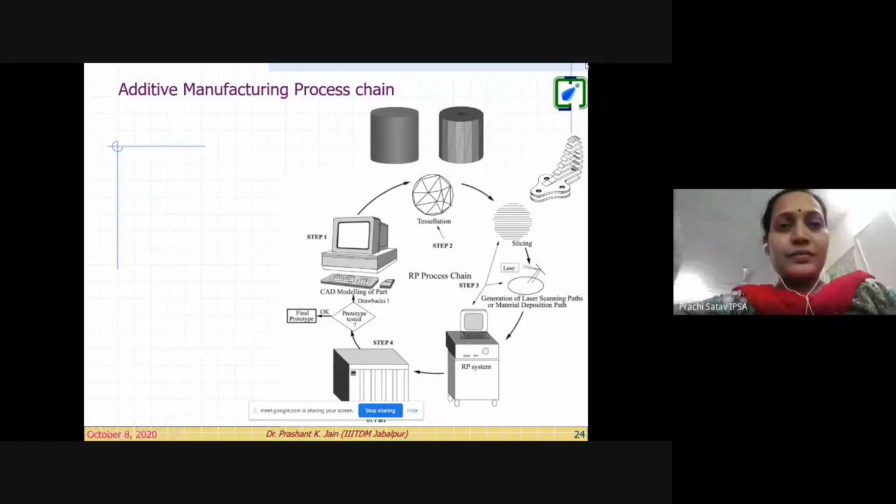So I hope by that time you have gone through some of the lectures on 3D printing. Yes sir, we have completed 2 days with 6 sessions, and today itself we have a session with Dr. U. Chandrasekhar, sir. Okay, fine. Almost we have completed 3D printing of PLA, ABS, and metal also with their practical demonstration.

Right, okay. So dear all participants, this session we have kept completely on the STL file, data preparations, error repairing. Most of the time when you see the FDM printers, the videos of the printers or machines, it's described with a very easy word like 3D printing. As an engineer, we call it additive manufacturing, but now this is most commonly known by the term 3D printing instead of additive manufacturing.

So people sometimes thought that, okay, just like our A4 size HP printer, we can type something on our computer system, simply press Control P, and have a print in our hand. But this 3D printing is not that simple. You require a lot of data preparation, then a lot of slicing, contouring, etc. Only then will you be able to print a good part.

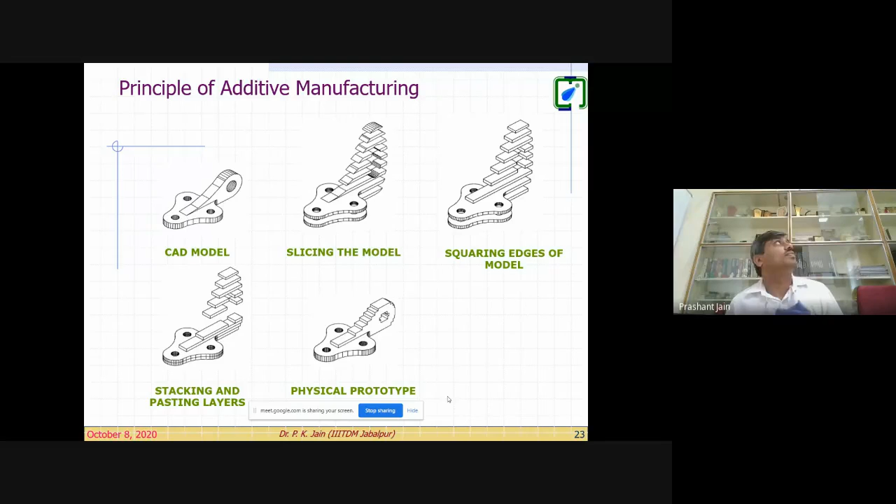Am I audible? Yes, you are audible. You noticed here the difference in two models - here you have the complete finished model, right? But here in the fifth model you got the stair steps, right? This you might have already gone through in some session.

So here, with materials related problems, we can have the minimum layer thickness, but this stair steps will remain there, right? We cannot remove it. So we require a lot of finishing approaches, post processing, polishing, grinding, many things. Based on that we can get the full physical model.

So that's the principle. Now come to the process chain. Can you notice on the top two cylinders? What is the difference in this cylinder and this cylinder? Anyone would like to answer?

So may I? Yeah, please. In first cylinder, that is completely fine shaped, and in the other there are some edges. In other, what is that? Your voice is breaking. Some edges are there.

Okay, anyone else? Maybe one is solid and the other one is hollow. I'm not sure about it. Okay, anyone else would like to add to it?

What is the first difference in two cylinders? First cylinder is a fine one, and second one has some dotted shapes. Okay, anyone else?

Because in the entire session, the key is in these two figures. What I am going to talk about in this entire session is on these two cylinders - what is the difference in these two cylinders and why this difference is coming?

Inside it is a model file, and the second image is the tessellation of the model. It is slicing - after slicing, it is converted to the mesh structure. It will be in model.

Okay, partially true, but that is not after slicing, it is before slicing. We will come back to the details of it. Anyone else would like to comment on that?

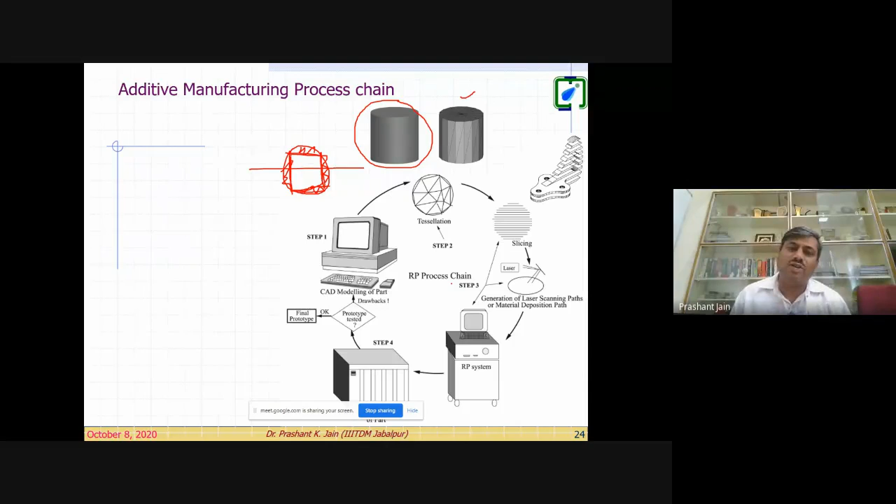To maximize or minimize the volumetric loss in this case, we keep the triangles. You look at this cylinder, all are triangles, right? See, all are converted into triangles. So even though this is a rectangular face and can be represented by a rectangle, we still maintain the standards and uniformity among all the models. So we have the triangles, right?

So this is the tessellation we do, and this tessellation will help us in the slicing, because the next step is to have the slicing. So if you see, I slice in this way - here, this slicing calculation of intersection points would be very tough, but here you see what has happened.

Now this line or this plane in 3D space, it would be a plane. It is intersecting with another plane. That plane is also a triangular plane, and the triangular plane also has 3 straight lines. So finally, your problem is reduced to the intersection of a plane with a straight line, right? That is the tessellation, and what we call in terms of our data format, the STL file, right?

So anytime whenever you go for a 3D print of any object for any machine, you try to get its STL file. Now what is in that STL file? Your surface was approximated by the triangles, right?

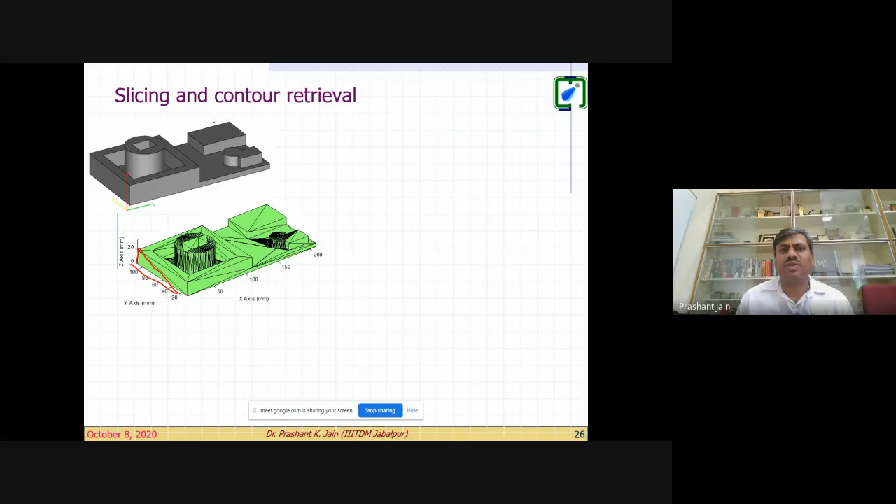Here there is a planar section. So what happened to this planar section? Now this is converted into the STL file. So you have this one triangle, another triangle. On the top surface, you can see this top surface, 2 triangles, one and another one, right? But you see for the circular face, we have hundreds of small triangles.

Why have we taken so many triangles? To approximate the surface more accurately, right? If you take only 2, what will happen? A lot of material would be wasted and it will be sliced like this, right? So tessellation in this way is not possible.

Now look at this, when we try to calculate the intersection in MATLAB, see this STL file is imported in MATLAB. I will show you the files a little later, right? And you can see here the green color plane is there. So that is the intersection plane.

And you can see, can you notice what are these blue dots here? Anyone? What are these blue dots here? Anyone would like to mention? Sir, is it for support material which is to be drilled out? No. Anyone else? What are these blue dots?

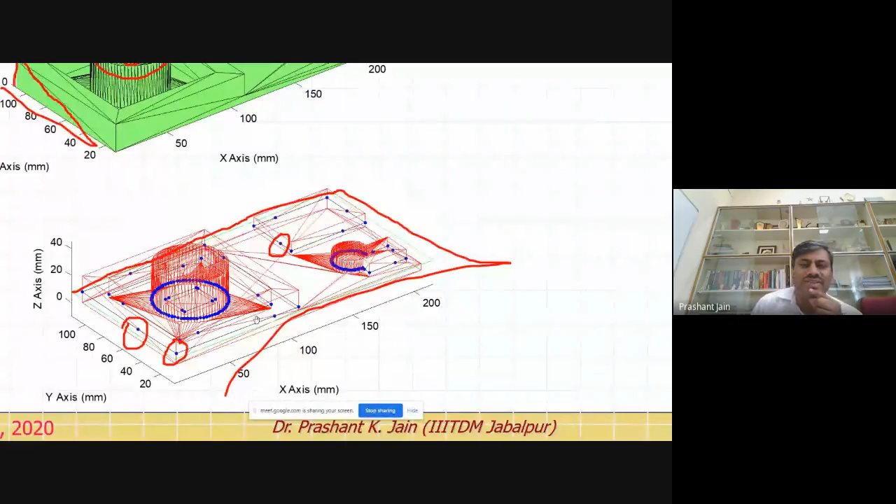Lattice point—this is the intersection point, right? The green color plane is there, and this plane is intersecting with this solid model of the STL file. So what does STL contain? STL has lines, right? Look at this. This line is coming from this end, and this plane is coming from this end, so you get an intersection point over here, right?

And when we connect all these blue dots, what is going to happen? We will receive... if as and when we receive this blue dot and I plot it, I will get this kind of information.

Got it? But this information has no use for us because we want to print this part, and for printing this part we want first layer, second layer, third layer information, and between that the nozzle path is required. So we need to connect all these dots in a logical sequence.

Look at this. When we apply some logic to connect them in a sequence to get the contour information, what is going to happen? We receive this blue color contour, right, and the red color contour. Can anybody tell me what is this red color dotted line and blue color line?

Anyone? These lines?

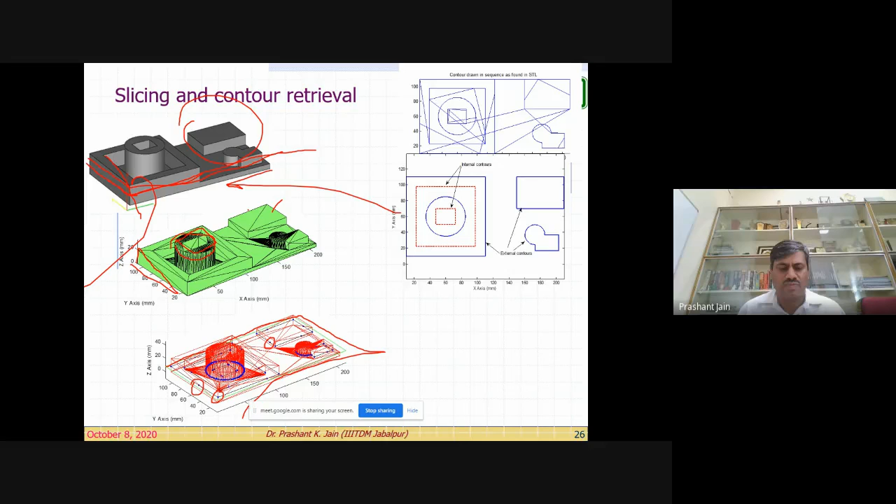Can you relate this figure with this figure? At this stage, if I cut this geometric model at this height—if I cut this model at this stage—we will receive this information. So you see this blue color is the external contour on this model, and this red color dotted line is the internal contour from here. Right? Did you notice this?

Now look at this figure. From here we can draw this kind of external lines, right? And from this you can see what is going to happen: for this, the nozzle will be here, you have to switch it on. Here you have to again switch on this. Here you have to again switch on this nozzle, right? This is going to happen, right?

So what is happening, if I draw a line over here, we can identify based on this contour intersection points, right? At this contour the nozzle will be switched on, and here the nozzle will be switched off. So what will happen? Material will be deposited here. The nozzle will continue to move here, then here again it will switch on, again it will switch off. This point is clear?

So that is the requirement for the STL file. We require the STL file, right?

Now look at this, how we make the model. Have you gone through this software screen before in any other session? Then I will skip, or else I will show you. No sir, it's the first time we are seeing that Magics software in this FDP, sir.

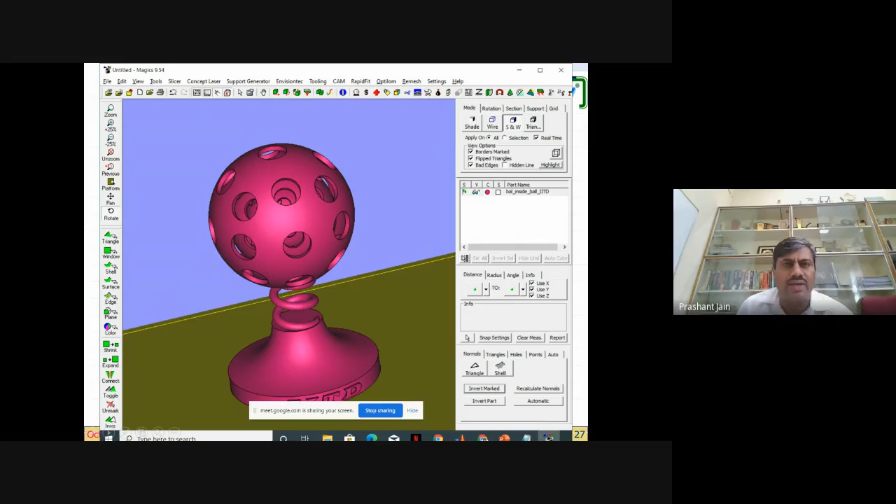Okay, let me run the Magics directly. Look at this, that's the Magics software you have. You can rotate it like this.

So you see here, we have manipulated this STL file and written the IIT Delhi file, right? And I will show you the original file as well. So this is the geometric model you might create in UG, CATIA, Pro/E, Unigraphics, anything, right? And then you have to take it to Magics for error repairing, etc. I will talk to you in detail about what kind of errors we have, right?

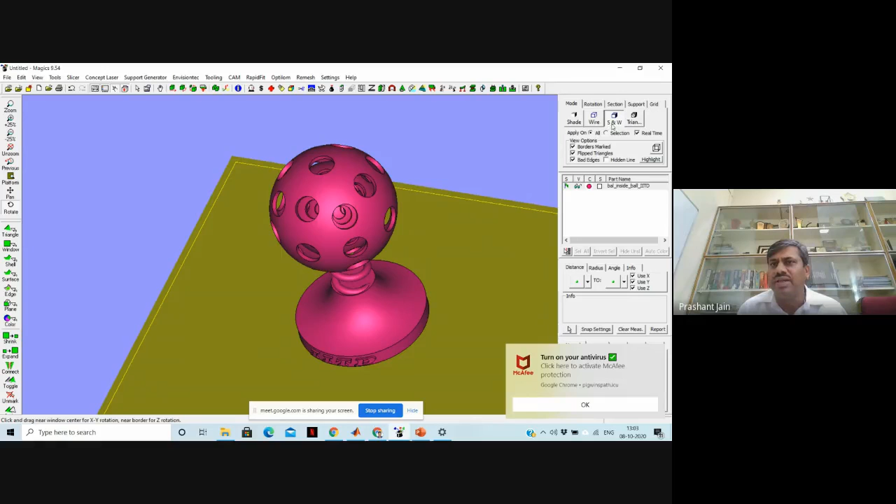So look at this, these are so many triangles you have, right? If I zoom it, you can see here how similar these triangles are, then here the smaller triangles at the cut portions, right? And then you can see over here, even in this spring area, how small the triangles are, right?

Now, if I take a cut, how does 3D printing take place in this case? Whenever you take any model, any sort of model, let me place it in this position. Let me take it to the back and go for a section.

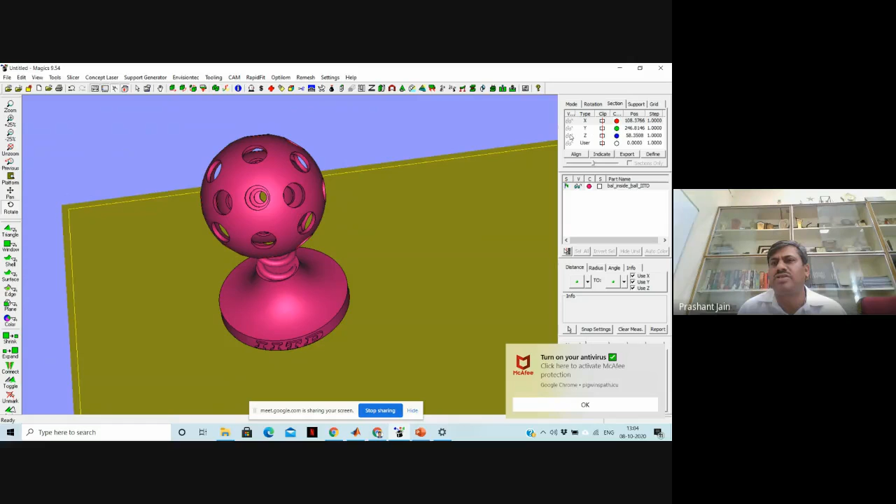Right? Can you see over here? This is the section model. So if you start from bottom, this is the first contour, second contour, third contour, like this, n number of contours. So here it would be a complete circle, right? That is the objective why we are talking about the STL file, right?

You see, at this stage only this is the material to be deposited, if it is an SLS process. And if it is an FDM process, the nozzle will deposit only this much material. You see here, and at this stage you have only one sphere, right?

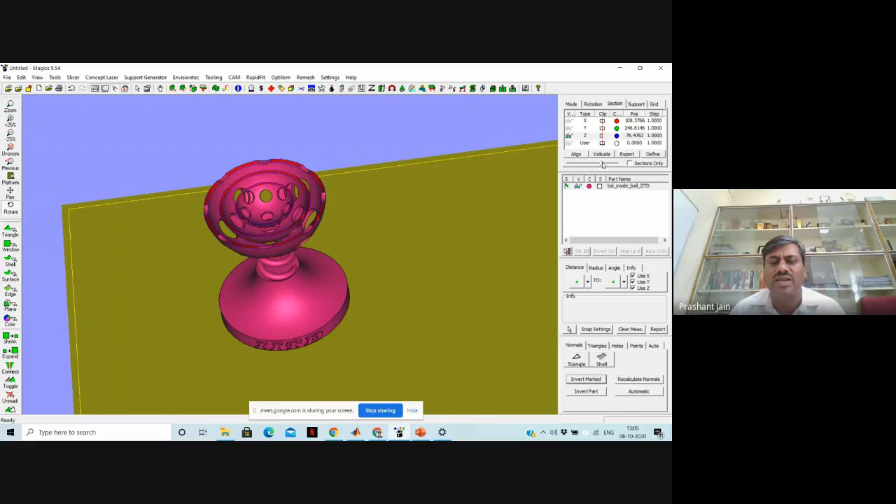Now the second sphere comes into picture, and the clear gap between two spheres is provided by the unsintered powder in case of the SLS process, right? Look at this, the third sphere comes into picture, and subsequently it will keep going on, right? And look at this here,

this contour information is required. You can see here, this is the contour information we want on each layer. And if you look here, in the triangular form, these triangles are cut and the intersection points are calculated at this level. You see here, this is an intersection point, this is another intersection point, and these are connected in a closed loop, right? So many contours on the same layer you can even have, right?

Okay, if you have any query at this moment, you can ask. Then I will go back to it.

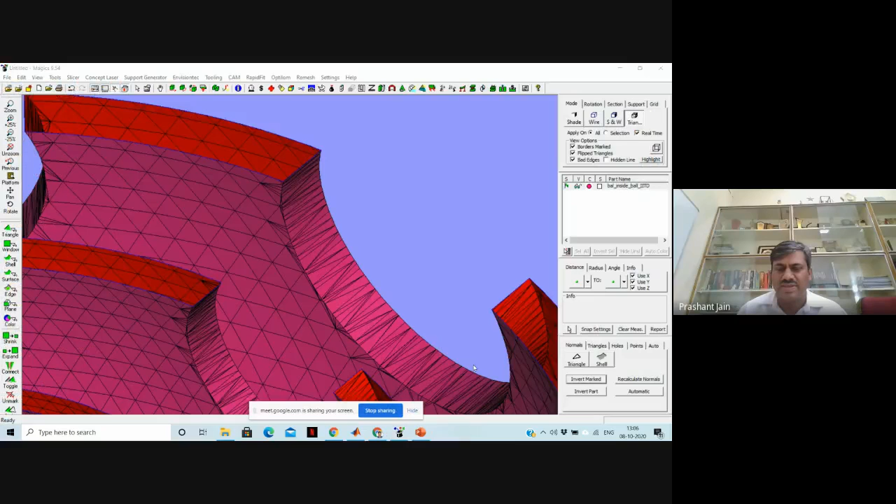Sir, I have one doubt. If you are using an FDM printer for printing this spherical ball, the support will be provided inside. How do we remove that support? If your support material is water soluble, you can use that. If not water soluble, then you will not be able to print it properly.

Look at this. It has broken down because this ABS material does not provide the flexibility to sustain the printing strength, right? So it has broken down, but this is printed on FDM only. This is a Stratasys MC400 machine. You see the three balls are there inside this, but the spring and the stand were broken down.

There are two nozzles in the FDM process. You've already gone through this, we won't go back into it. But the point was that in another nozzle we use water soluble material, so that will dissolve in water. That is the only way we can print this kind of fully functional assembly.

This is again printed on FDM, and you see proper tolerances are given inside. If we use a single material, the parts will join together. So we use two materials - for support, we have another material that is water soluble.

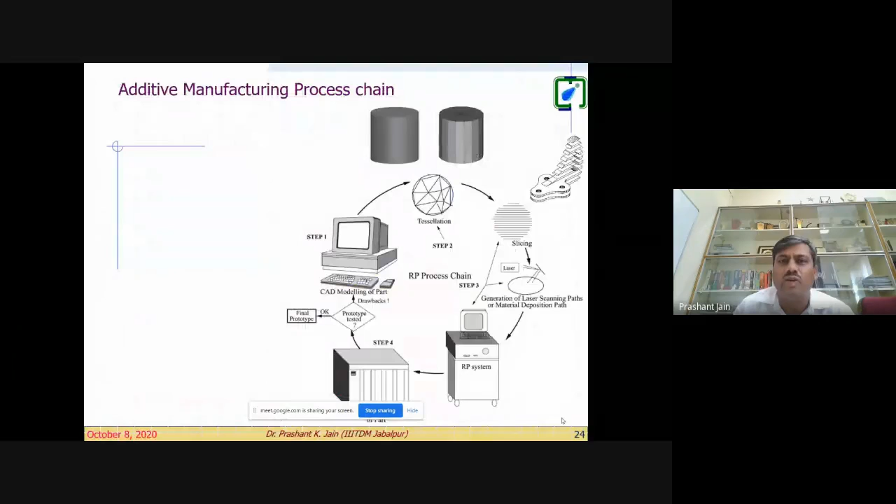Okay, let us come back. I hope you can see my presentation screen. Yes? That's the part I have shown you, the STL model.

So this is one part of the introductory section I have taken. I hope you understood the need and importance of the STL file and why we are choosing this topic to be part of this FDP - the STL file manipulation.

Sir, excuse me. Anybody wants to speak something? Please share your view. I have a question, sir - your drawing, whatever you have shown now, it has been meshed, isn't it? You have meshed the component that you have shown now. If you talk in terms of FEM, you can call it a mesh, right?

But what happens when you talk about FEM mesh is that there can be many types of mesh - it can be a brick element, it can be a tetrahedral element, it can be anything, and it can be a solid as well. But when we talk about the additive manufacturing process, 3D printing, we are only talking about the surface model, not a solid model. So that mesh, you can also say it is a mesh because it's a similar process.

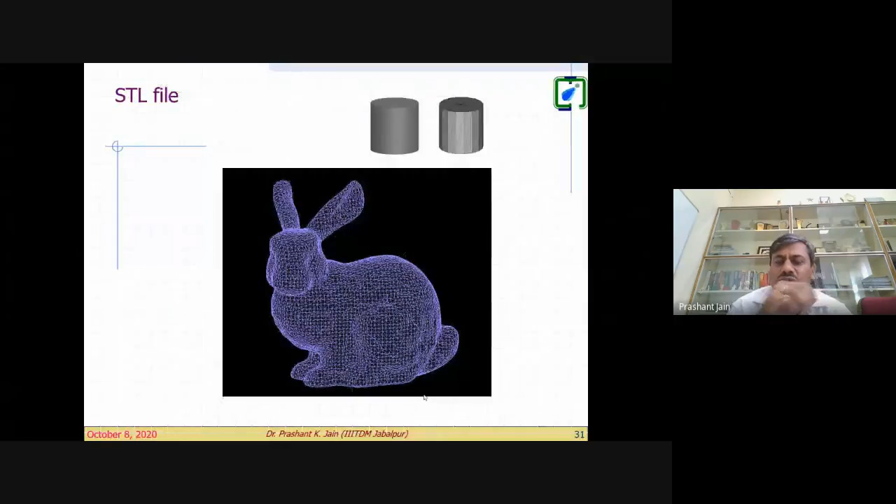So now let's come back to the more technical side of the STL file. This is what we discussed - you see the small rabbit model with a lot of triangles on it. We could have a smooth surface, but we have chosen only triangles so that we can slice it - that is the purpose. If it is a cylinder, this will be represented in terms of triangles like that only.

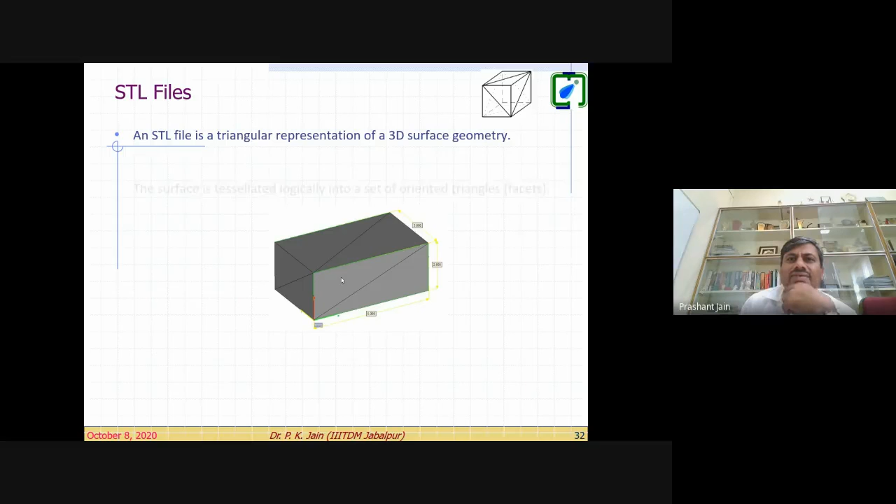So what does this STL file have? We use the STL file to represent the triangles, but it has to follow certain rules. Look at this - the number of faces must be even, and the number of edges must be a multiple of 3. You can understand these as small rules. For example, if you have a cuboid, how many faces do you have in a cube? Anyone would like to answer?

6 faces will be there. And when we convert this into a STL file, because we have to take everything in triangles, so how many faces do we have? 6, sir. 12, in that case, because you need to convert this into triangles.

So all 6 faces are rectangular in nature, right? So when you convert this into triangles, you now have 12 faces. You can observe here, you have this one face, another face. Earlier it was a single face, right? Now you have these 2 faces. So you will have 2 faces on top, 2 faces on bottom, and then all 4 sides. So you will have 12 faces.

Now look at this, every face has 3 lines, right? This face has 3 lines, this face also has 3 lines, right? So definitely if you have 12 faces, then the number of edges must be a multiple of 3 if the file is correct. You got the point? Why are we talking about these rules? 2 times the number of edges must be equal to 3 times the number of faces. Simple equation, Euler's formula for checking the wireframe models, right?

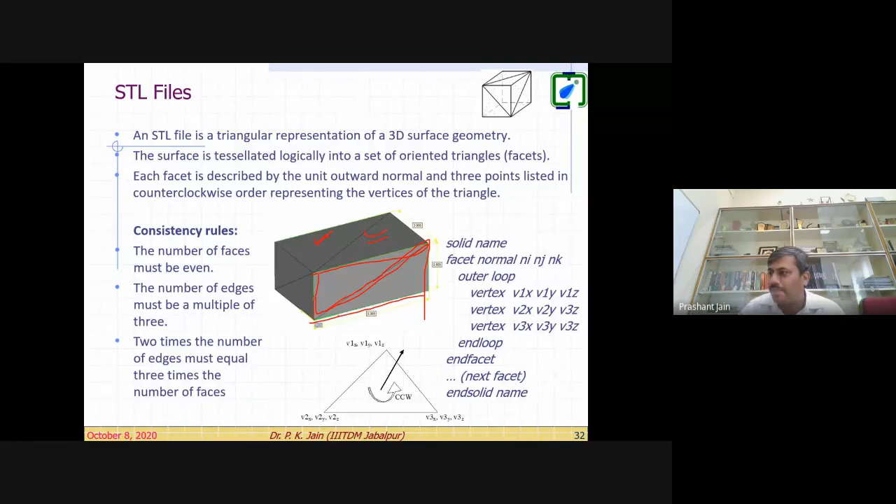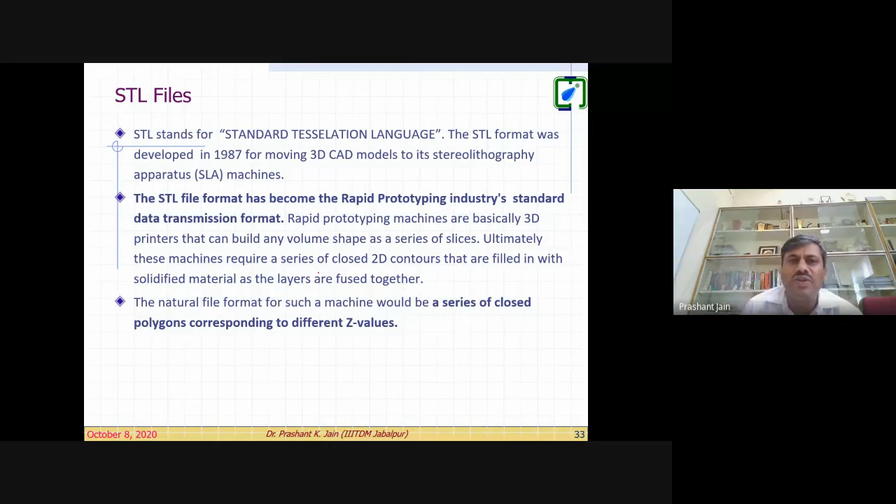And then how do we write the STL file, right? So this has already become a standard. Whatever free or open source software you use, whatever model you have to use, whatever kind of machine you have, whatever kind of technology like FDM or SLS, anything, what has happened? We have the STL file as a standard, right? So we use this to generate a 2D contour, right?

So look at this again, a few more rules. The file will contain 3 vertices, right? Say this one vertex, this one vertex, this one vertex. 3 vertices for each triangular facet and 1 normal pointing outward, right? That is the scene in the previous slide I showed you, right? So you have the 3 vertices like x1, y1, z1 and 1 normal, right? So total 12 floating points are there to represent a triangle.

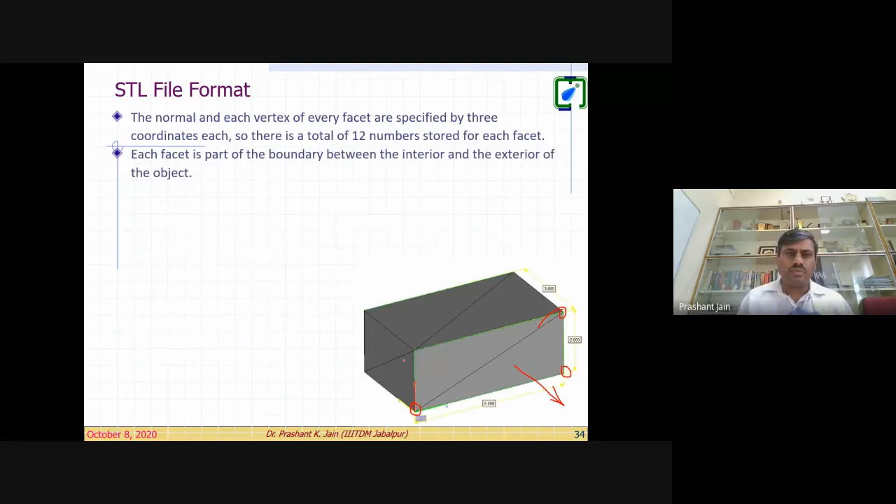Now here we have to identify which side of the face is interior, which side of the face is exterior. So the normal will tell us, right? And a further rule: each triangle must share 2 vertices with each of its adjacent triangles. When I say each triangle will share one of its edges with another triangle, what does it practically imply? That means there is no gap. These two faces are closely joined with each other, right? If this edge is not shared by these two, that means what has happened? There is a gap. We will come to that a little later, right?

So we have here, I think some slides I might have kept hidden. Let me check once. I think 1 or 2 slides are kept hidden. No, it's okay, fine.

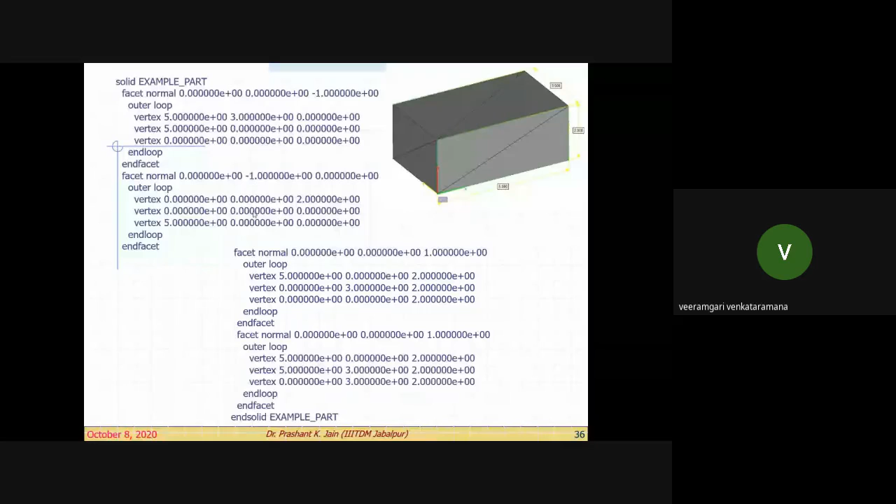Yeah, here we have to observe. You notice a lot of things. You see, this is the STL file. If we open it in WordPad, see, I have here 2 files, and that is the structural difference you see. In the first file, if you notice here, let me open it.

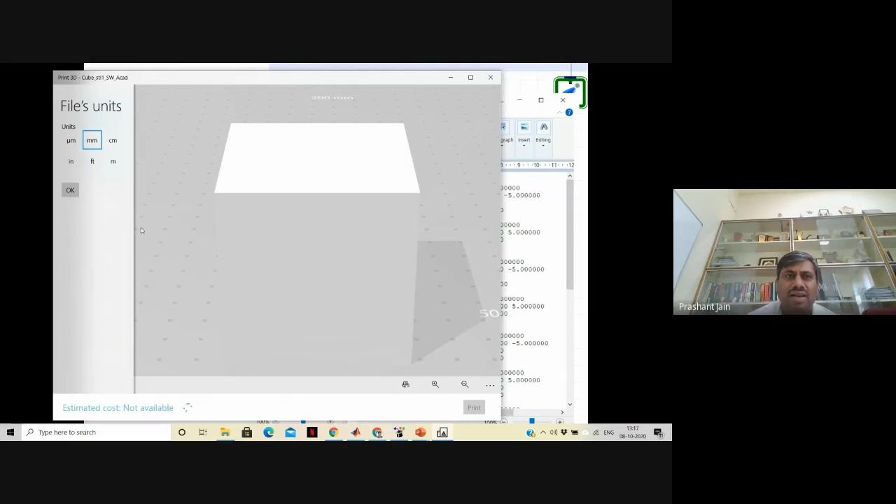This is the file generated from... okay, this I have opened in Print 3D, right? This is a cube, right? So this is the cube STL file you can create in ProE or anything else, right? But when you open this file in WordPad, you will find this kind of text is there, right?

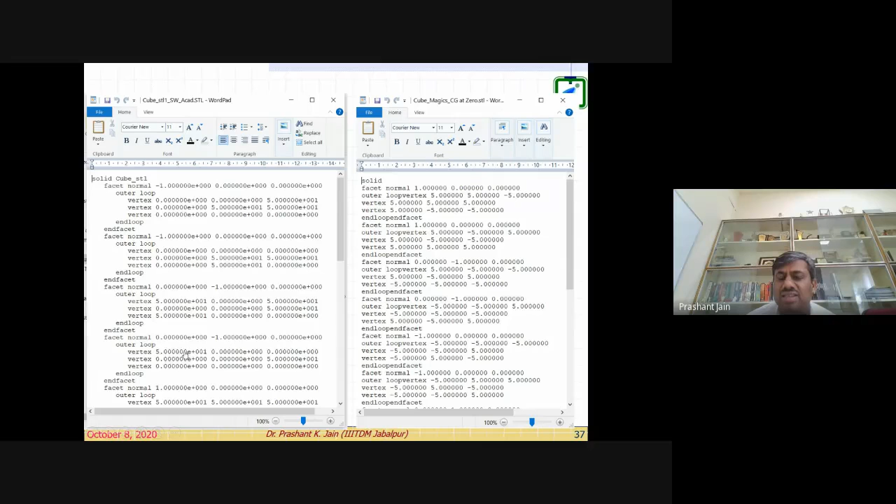And if I create the same cube file, this is from SolidWorks and AutoCAD, and this is from the Magics software. This is the difference in the structure. You see how the information is written in this form. Let me run a MATLAB program, then I will come back to it, so you can have a better understanding. See here, I have written a small program to read that STL file.

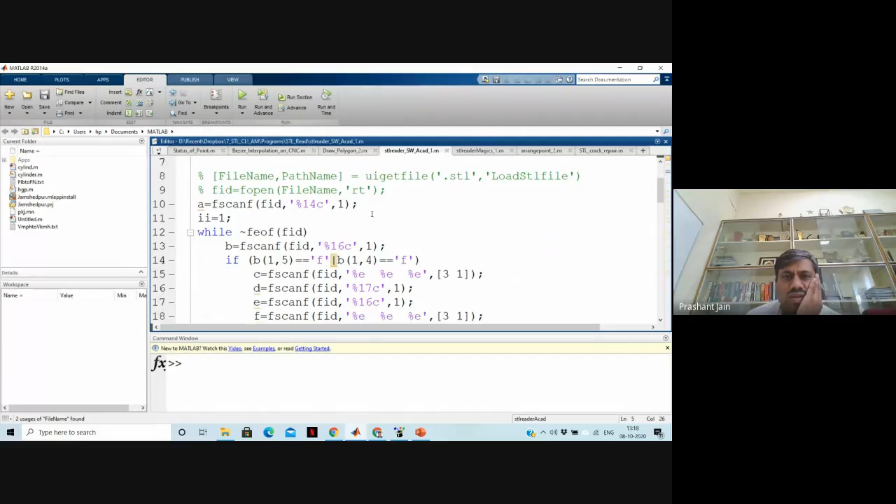Just like your C program, a small program is here, but this program will open the STL file in MATLAB editor, and then read one line each time, then store all the coordinates in a form of a matrix, right?

So if I open a cube, this is just we made it like that, so this is not any open source utility, it is a self-developed program. So let me open this file.

Look at this, here are 12 triangles, right? And for each triangle, xyz of one triangle, and this is the normal. So you can see it's keep on changing. First line is the normal and other three are the coordinate, right? So this is for...

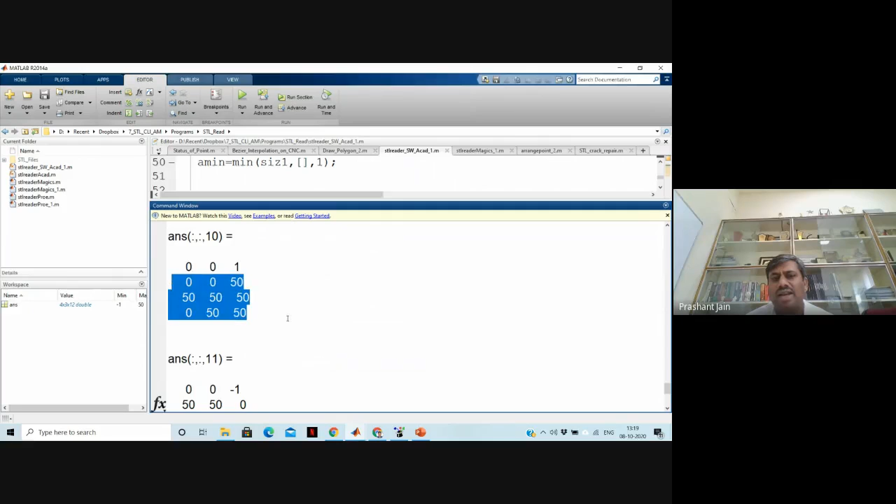2 times we have run. This is for first face, second face, third face, fourth face, like that, right? So this is up to 12 faces.

This is the 5, right? And you see in the MATLAB. How many of you are aware about the MATLAB programming? Anyone?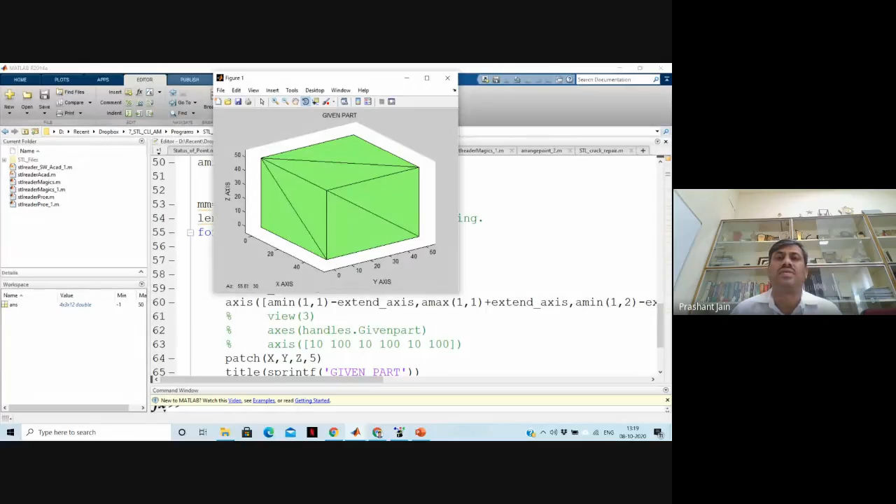Oh yeah, little bit. Sir, we learned it, but we didn't practice. We don't have practice on that one.

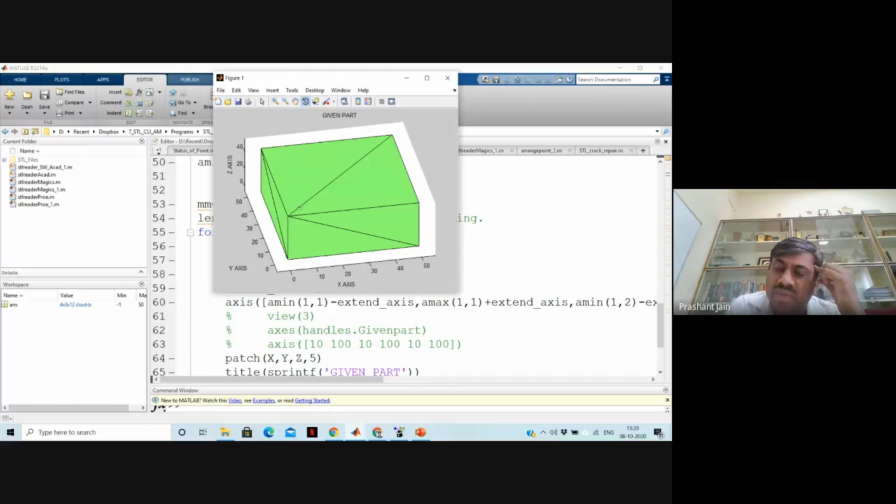Okay, what here I want to emphasize, if suppose we want to pursue our career, our research in additive manufacturing, we should know how to intervene with or how to manipulate the STL file. We cannot every time depend on the commercial software, because when commercial software generates any STL file, it may have a lot of errors. And for any kind of research activity, you may require to generate your own tool path, right? So you cannot generate it unless you do your own programming by your own self. Otherwise, you can print this kind of part.

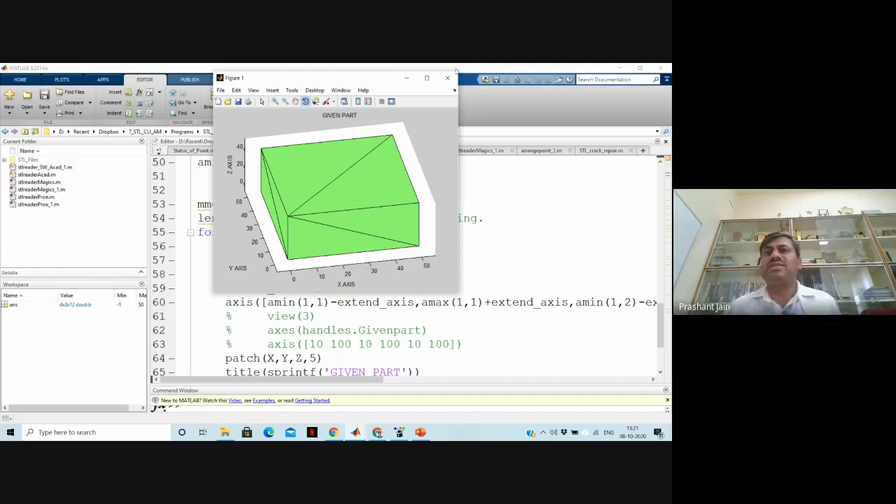But suppose you want to vary the vector length, you want to vary the width of this, or some other process parameter, that may not be possible in that commercial software. So look at this. This is one. Let me open another file with this program.

So I have few... Yeah, you can ask which question. Add-on will be used for plugin in MATLAB? MATLAB for what plugin? We are using it like for simulation, like linking mechanism. Simulink will be used for add-on, no, MATLAB.

MATLAB has more than 50 toolboxes. But here, what I've shown you, this program to open the STL file, there is no plugin available for this kind of thing, right? This is a user-developed program.

Okay sir, okay, now look at this. If I use another file, it will not accept it. Look at this. If I run this STL reader Magics file, and if I open the same file which I have already opened earlier, right, this file, this doesn't work. See, both the files are written specific to the program.

The reason is this: the file exported from SolidWorks and AutoCAD have a different structure, and the file exported from the STL reader Magics has a different syntax written. So if I want to run this program to read a Magics file, I need to modify my program. Look at this, I open this file, now it's working fine. Got it?

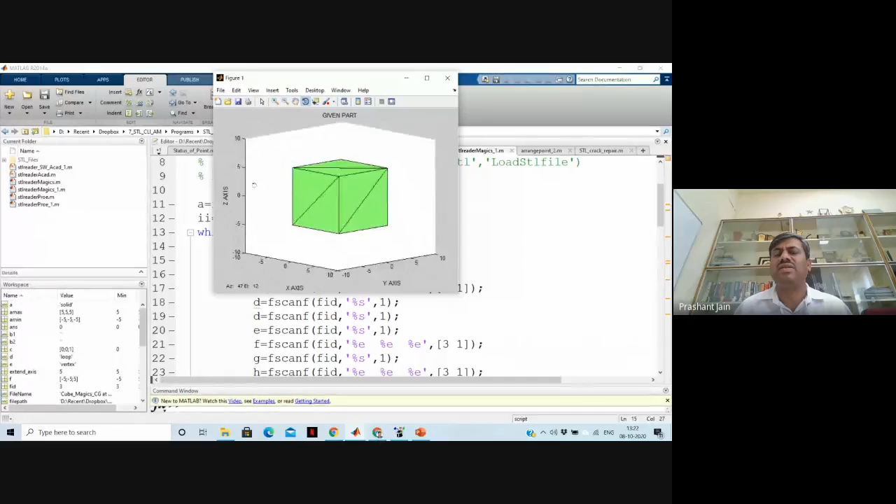Right? And you see, if I go back let me open that file for you. Right? I have opened this file. So here we have an advantage. You can open it and you can see it in WordPad, right? Look at this, you try to do this.

Look at this, this file is written in this way, right? And the earlier file I showed you that one, right? Look at this, that is the difference in these two files. I have shown you in the PPT slide, but look at this, how this syntax is. Here the scientific unit is there, here the simple decimal unit is there. Everything is left aligned, no tab spacing, and here there is tab spacing. So when I did this programming at the start of my PhD program, I was worried.

I had written a very good program to read an STL file, open it, do the cross sectioning, do the layering, generate the nozzle path. But one day my fellow researcher came to me and said, okay Prashant, please do the slicing of my part, and my program was not working. Then we realized what the difference is. We got to understand, because I was using the Magics software, so my file was in this format. And he was working with SolidWorks, so he brought me this file, and my program was not working. Then we did a lot of understanding, figured out how I need to modify the program, where to modify, right?

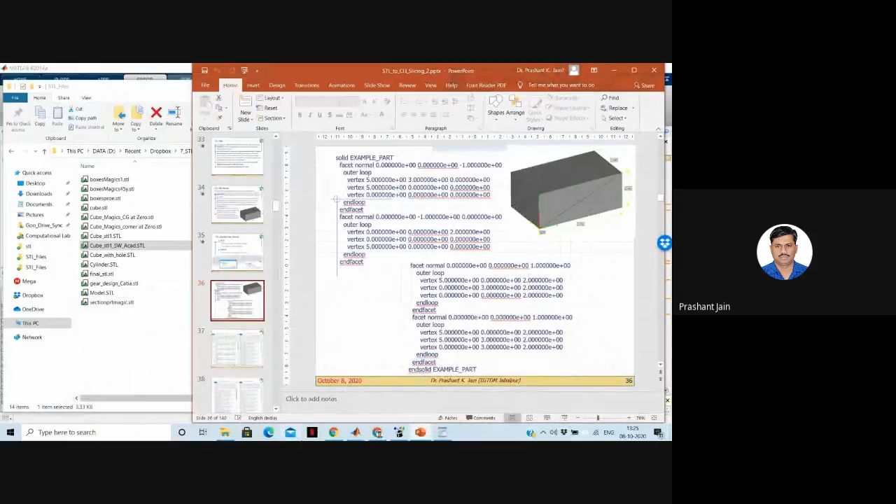And here you see, this STL file, we can even write without even going for Magics or Pro-E or CATIA. And I will make you understand. Look at this, in this case I have taken... this way, right? So look at this, I have used it here.

I have taken the center at the origin. Now you can relate this file. The 10 mm cube is there with the center at the origin, so all XYZ dimensions will go up to +5 and -5 of the corner points. You can read this word file and understand what kind of cube is there and where it is placed.

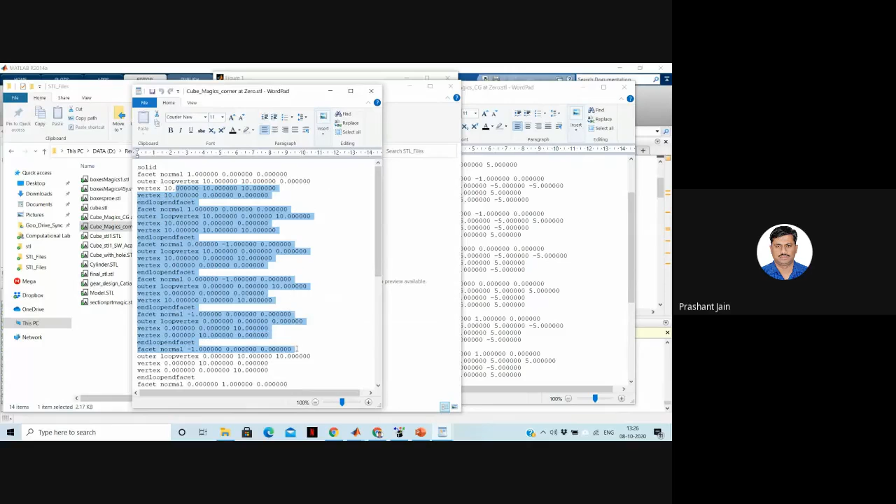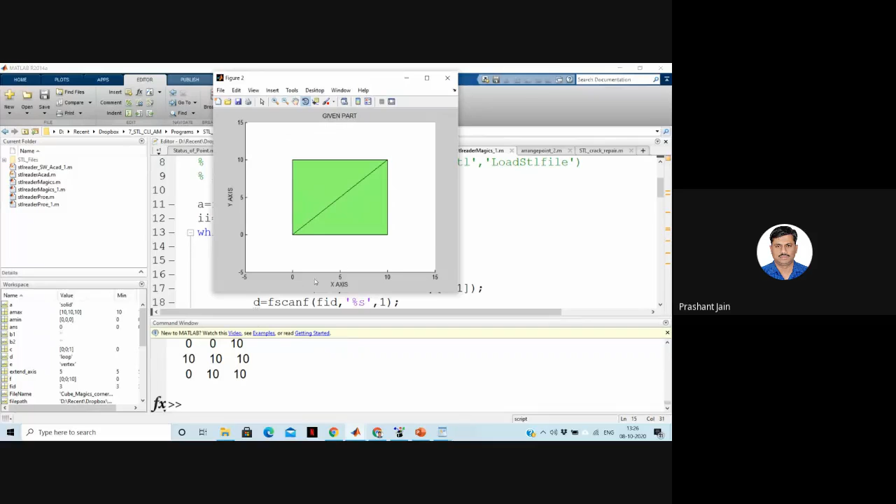I have taken this cube with the corner point at the 0 position. Look at this, what has happened? Every unit has become 10, so starting from 0 to 10. And if I open this file in MATLAB, let me run it. Corner at 0. You can see here is 0, 0 is the corner. And in the previous figure, it was 0, 0 at the center.

See the difference? So you can relate: it's center at the origin versus corner at the origin. Got it? This is how we need to develop our own understanding about the STL files. That is the objective here to discuss.

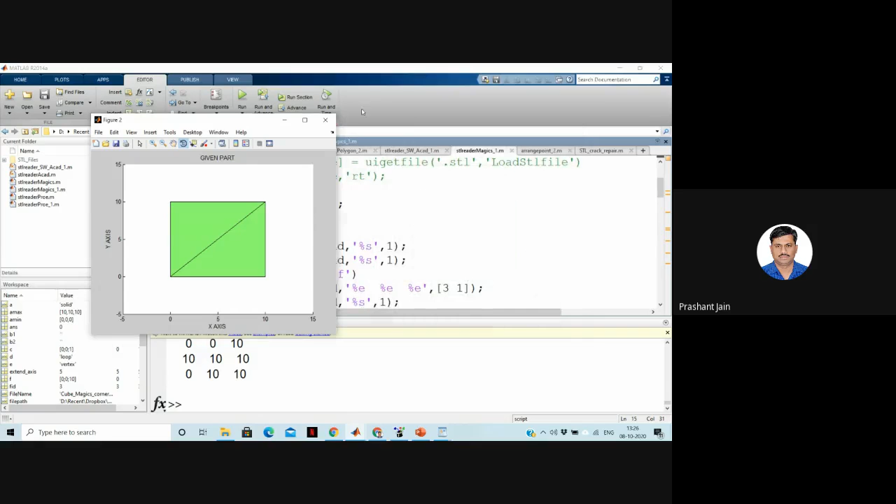Okay, let me move on to something more. If you have any query at this stage, please ask. Let me close all these files.

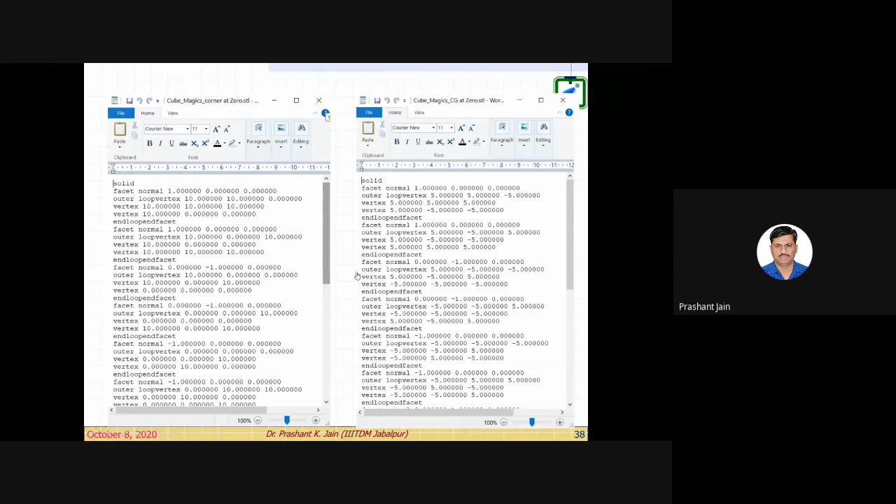So that is the thing, two things I have shown you, two files. You can see only this difference: the cube in one is with the corner at 0, and here the center is at 0.

Excuse me sir, the STL programming that you are showing, is it to repair the non-joining surfaces, or can we change the dimension of the component itself?

Yes, of course. If you want, you can go to your WordPad file and change the dimension. Instead of 5, you can make it 10, 25, and make it consistent. So even without going to Magics, Pro-E, CATIA or any other software, you would be able to manipulate your STL file on WordPad itself.

Can I save that to modify the diagram as a CAD drawing again? Yes, nothing is wrong in there. You just go to the Word file and simply save it as it is with the .stl extension. Don't change the extension, I will show you.

Sir, can that STL be changed to a CAD drawing? Unless you keep it in the .stl file format, it will remain an STL file. It cannot go back to the .prt file because you have already tessellated, so a lot of volumetric data is already lost. That cannot be kept back now because it's the designer's intent.

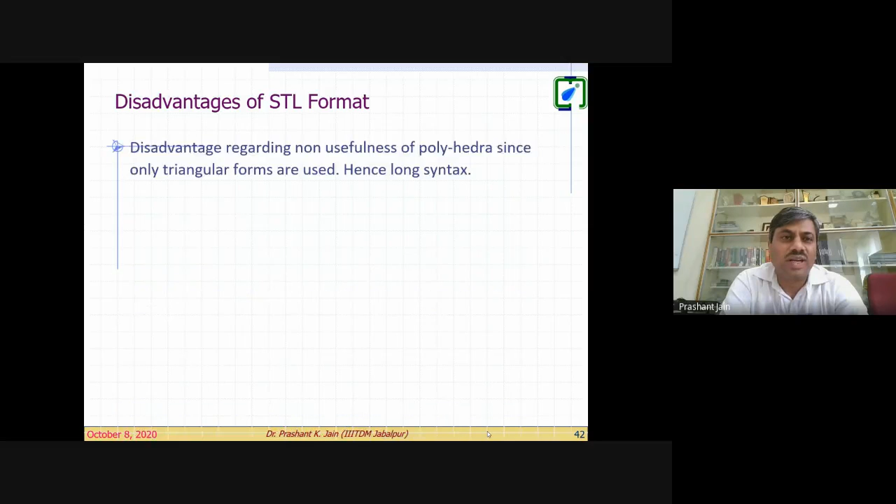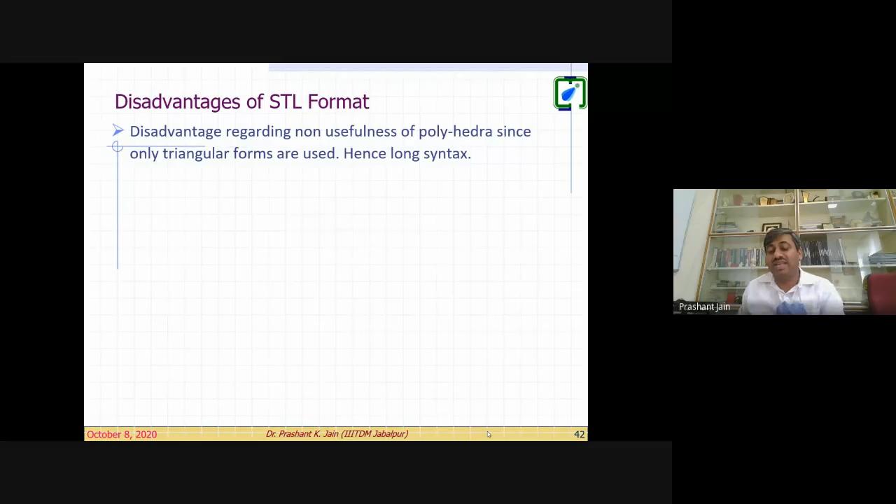But now there are some disadvantages as well. First, non-usefulness of the polyhedra: we are using only triangles. But if I have a cube face which is already planar, I don't need a triangle, even a rectangle would be sufficient. So we are using the lowest polyhedra of 3 sides, unnecessarily increasing the size of our STL file. Many times the file size may be much larger than the original CAD data, and because of tessellation, volumetric loss would already be there.

Then we have a lot of redundant information. You see here, these are 4 triangles, so this point can be common. But in the case of an STL file, every triangle is written separately, so this point will come 4 times. Similarly, look at this corner point, how many times will this common vertex come into the STL file? Can you make a count of this, how many times this particular vertex comes in the STL file?

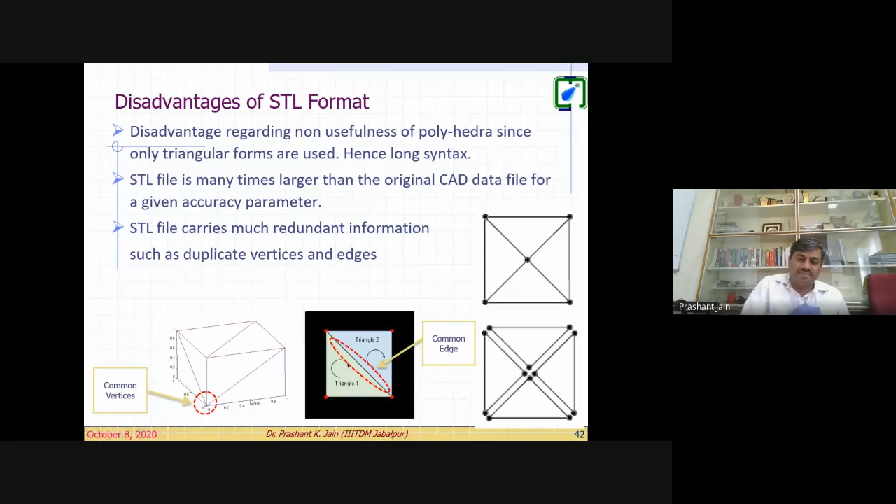Four times, sir. 1, 2, 3, 4 faces are showing in front. There will be 2 more faces on the bottom side, so 6 times, might be 6 times, might be 5 times. And if you see the vertices, this is coming how many times? 1, 2, 3, 4 times. So very much redundant data. Similarly, this common edge will come in this triangle as well as another triangle.

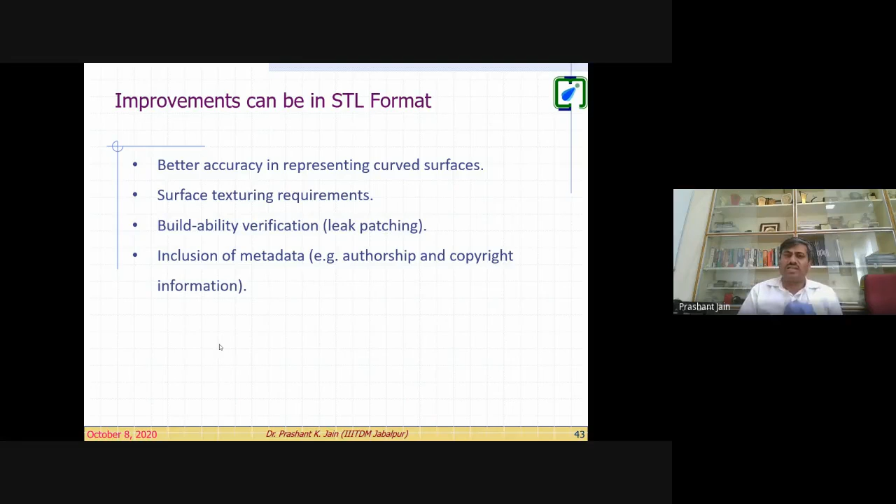So a lot of improvement can be done with the STL file, like better accuracy in representing curved surfaces, surface texture and requirement, buildability verification, like checking whether any leak is there or not, then inclusion of metadata, etc., which is not possible at this moment. So people are working with the STL file as well.

Another situation will come like this: number of triangles. You see, this is the same geometry, both the geometry are same, but here we have approximated with a larger number of triangles. So only 8 triangles here, and here the larger number is 944. See the huge difference in the file size. In this case, only 8 triangles, 2285 bytes is the file size. And here you see 2,67,000 bytes - same file, depending on the number of triangles. So here, this is more close to the original geometry; this is a very rough approximation.

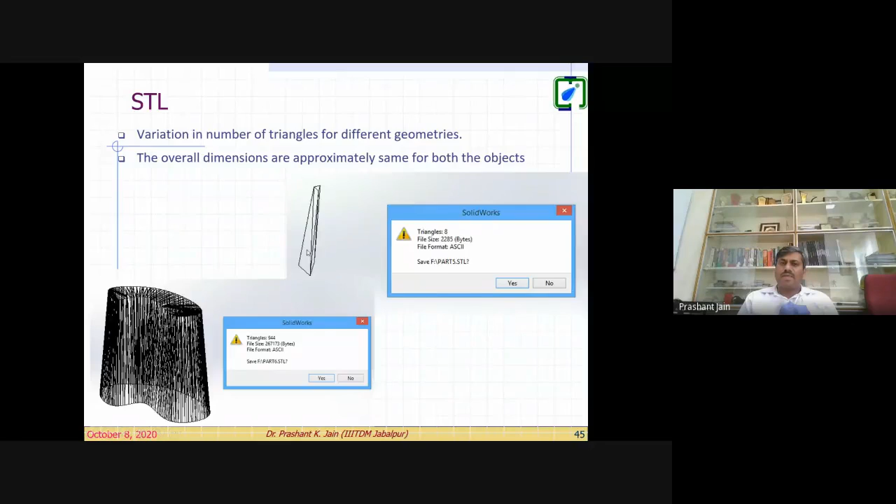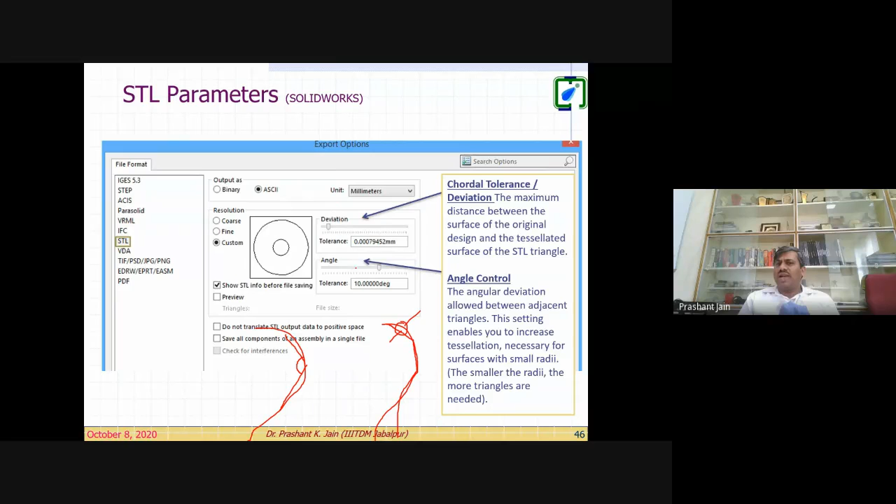So these things we control in the STL file, parameters like the chordal error and angle control - two things would be there to control, and that will vary the process parameters. So chordal error means, for example, this is the curve, and you are approximating as a planar section, so you can cut like this, like this, like this. So here you see this gap created - this distance between these two is known as the chordal deviation. Similarly, the angle control: if this is the point, now you start cutting like this, so that angle, we measure that angle. Depending on these two values, the number of triangles will keep on increasing and decreasing.

So that is why we should understand about the file size - why most of the time you look for 4 GB RAM, 8 GB RAM, i3 processor not working on your PC or laptop, your laptop overheating during file tessellation or slicing. That kind of situation may come. So we control these tolerance values and accordingly we change the number of triangles - two tolerances, deviation and angle tolerance, and chordal error deviation.

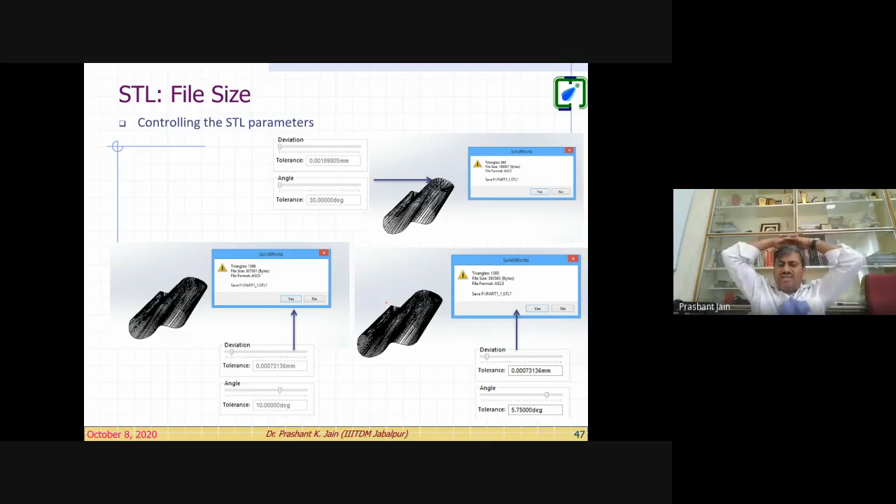Now, what is the reason for these bad STLs? If you remember what we discussed, we talked about adjacent triangles must have two vertices in common, the orientation of the triangle - what side is in and what side is out - and the normal must agree. So if any of these criteria are not matching, the problem exists in the STL file.

So several problems exist like this. Commercial tessellation algorithms we use while exporting STL files sometimes result in approximate polygons, which exhibit gaps - meaning cracks, holes, punctures, missing facets - then degenerate faces where all vertices become collinear, so your triangular facet will become a straight line. Then overlapping facets, then non-manifold topological conditions. So these are the major problems.

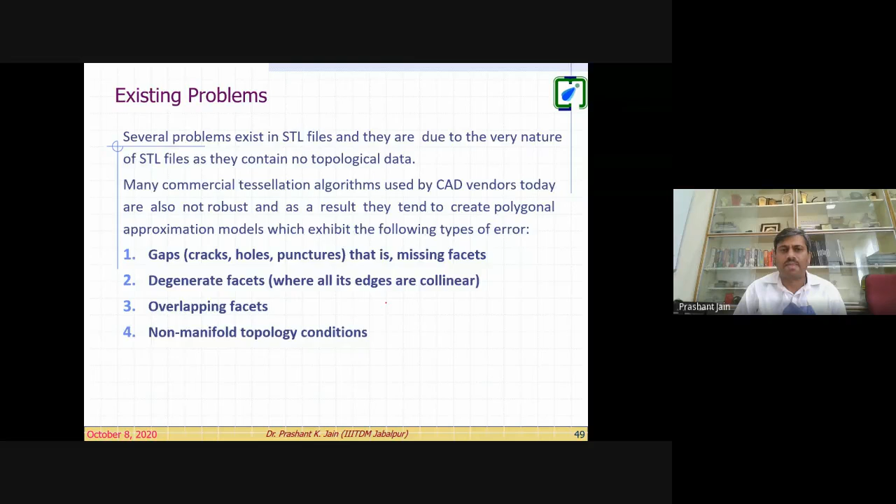In today's session we only talk about the first problem: gap. So look at this kind of situation - a very large deviation in the curvature is coming. Your software will not be able to handle this, because you might have taken tolerances larger than this. So what will your software do? It will not create a face over here, so there will be a hole, and your machine will not be able to print that part.

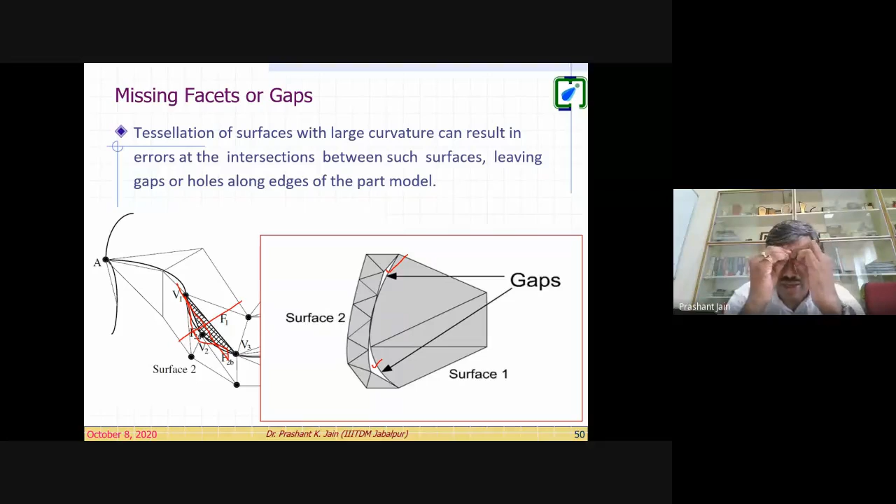Look at this case in a much better way. This is the top surface, this is the vertical surface, you can see. So the tessellation you do, but here what is happening - because of your tolerance set, you might have set the tolerance limit say 2 millimeter, and this gap is within the 2 millimeter. So here this gap is created. Now because of this gap, your STL file will not be a closed pack volume. Because of this, your STL file is not closed pack volume, and you will not be able to slice it.

Similarly, you see here, if a situation like degenerate faces occurs - this is another surface, this is another surface - so at this edge point, this complete triangle has become a straight line.

Now you may ask, what is the problem with the straight line? Suppose I have this pen in my hand - what is the normal of this pen? Okay, let me take this box instead. This is the plane surface, so anyone can say where is its normal? This is the normal to this plane, right? Can I say this is the normal to this plane?

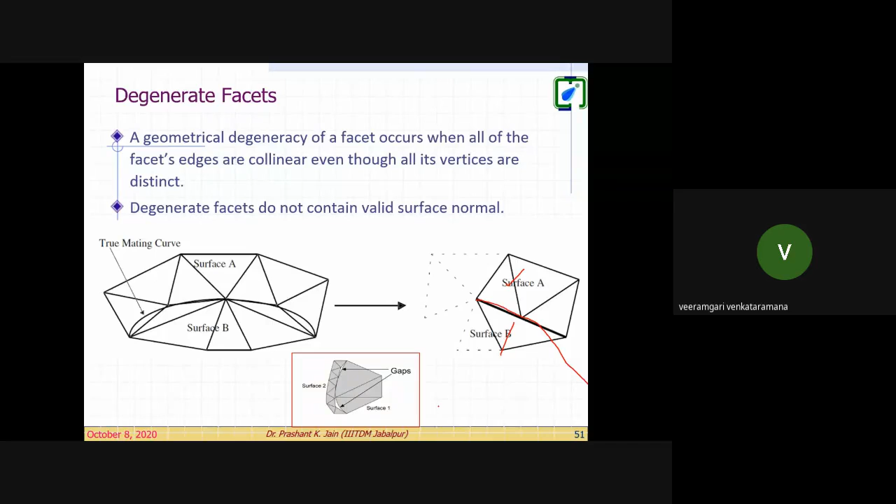Okay, now, if you have any more questions, please ask at this moment. Sir, what is the relation between the nozzle movement and the slices that you are making? From which point to which point will the nozzle move and deposit the material?

That is up to the software. Quite possible even in this case - suppose, say for example, this is the part you are going to make. Keep it on this. So your nozzle will be starting from this point, moving to this point like this, so that you can fill this part.

Now, quite possibly you have this kind of part with a hole inside. Now your nozzle will be starting from this point, coming from this point, moving like this. Now what will happen here? You can adopt this strategy - lift the nozzle up, move into this, lift the nozzle up, move into this, and continue. Quite possibly you don't go into this side and keep on connecting. A lot of research papers are available on nozzle path, and then you leave out the remaining area. That is a completely different topic, I would say, for right now.

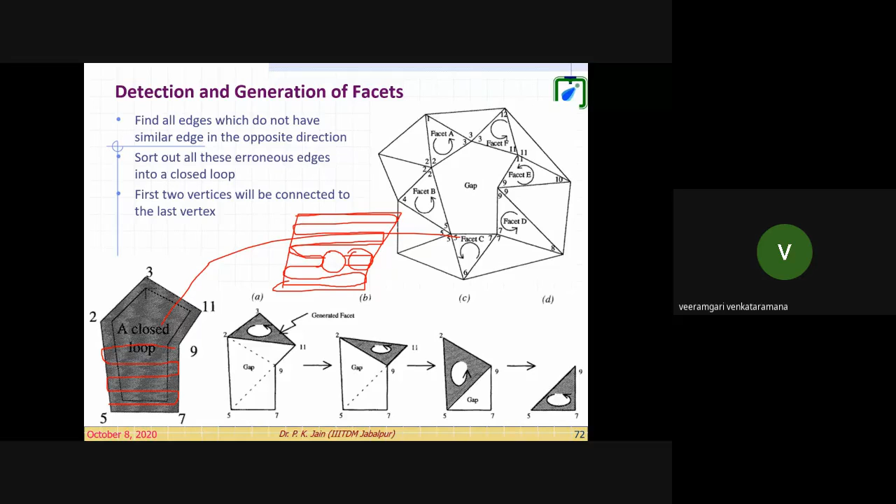Sir, how does slicing help in manufacturing? What is the actual role of this slicing, where does it help us? Because in 3D printing, as you've seen through many sessions, you require contour information. So what do you mean by contour information? Contour information is the layered information. Until and unless you have layered information, how will you deposit the material? Got it? Let me give you another example.

Can you see I have a tea coaster in my hand? I hope you can see the different layers. So say for example, this is a complete part to be built through 3D printing. So what will 3D printing do? It will make the first layer. Once the deposition of material on this first layer is done, then it will take the second layer, third layer, fourth layer, fifth layer, and sixth layer.

Now, actually, what is required? You have to make this solid part. To make this solid part, what you need to do is cut this solid part into 6 layers, and then you start depositing the first layer, the second, third, fourth, fifth, like this. But actually, this is a single part.

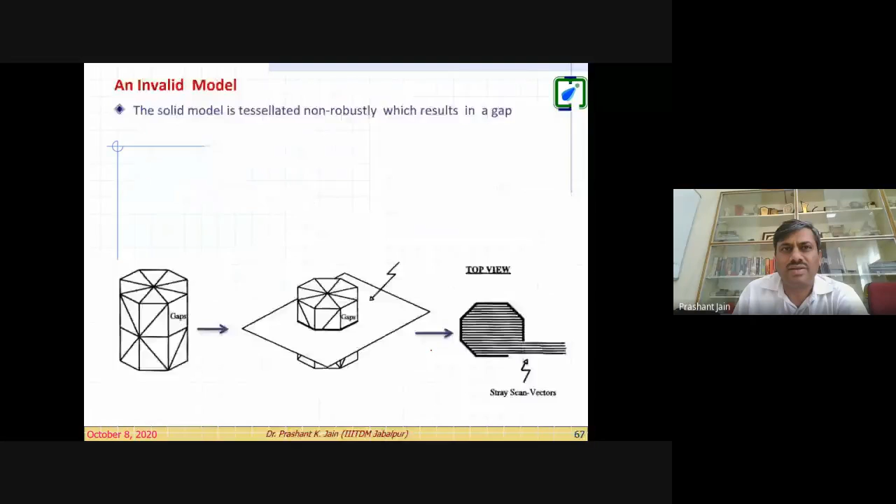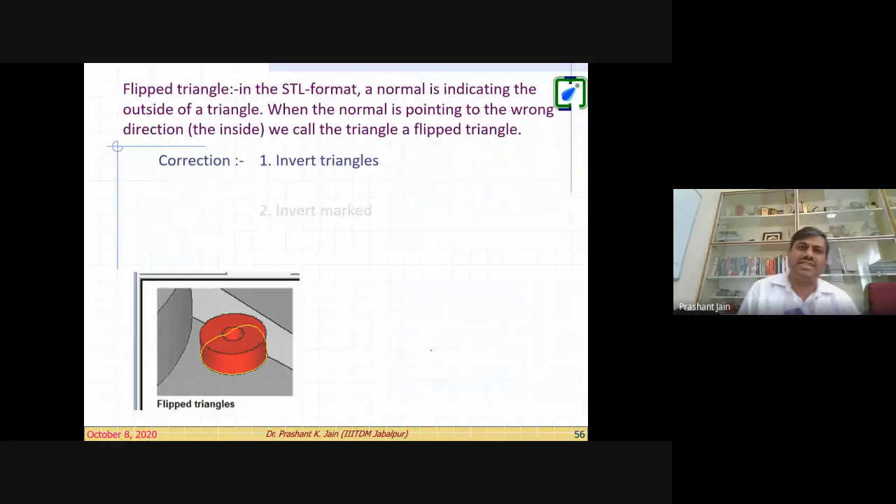So there are many errors in the STL file, like flip triangles, bad edges, near bad edges. This is a flip triangle; bad edges means not connected. You see the hole on the top surface, there is no face. There should be a triangular face. Here also the tessellation should be done, but the software failed to do it. So this is a hole.

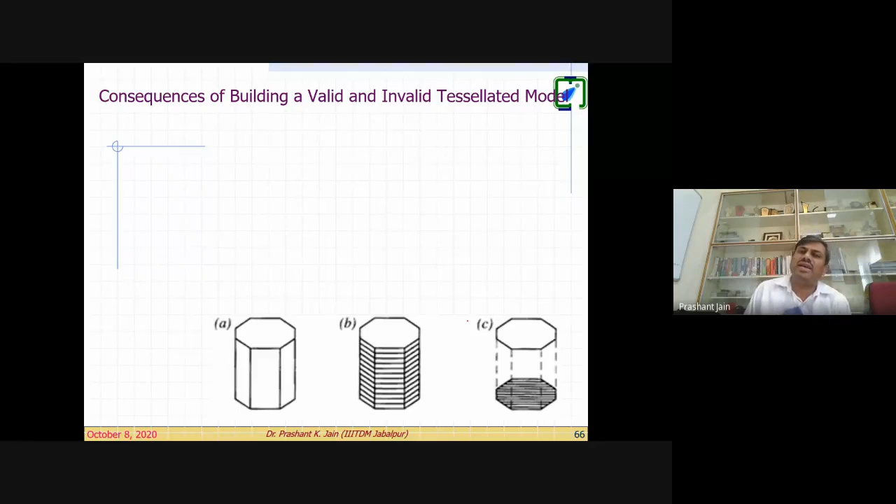Lots of holes. Now, before repairing, we will not go into repairing in today's session, but look at this. What happens if I do not repair, if I do not validate my tessellated model? See here, we have this model.

This kind of slicing is required and this nozzle path is required. So we cannot directly slice it. So what do we do here?

We take that same model and tessellate it. Tessellation meaning is clear now, we triangulated it. You can also say we meshed it. Then we take a plane and do the slicing. So what happened here, there is a surface, so you will receive this point, and this point.

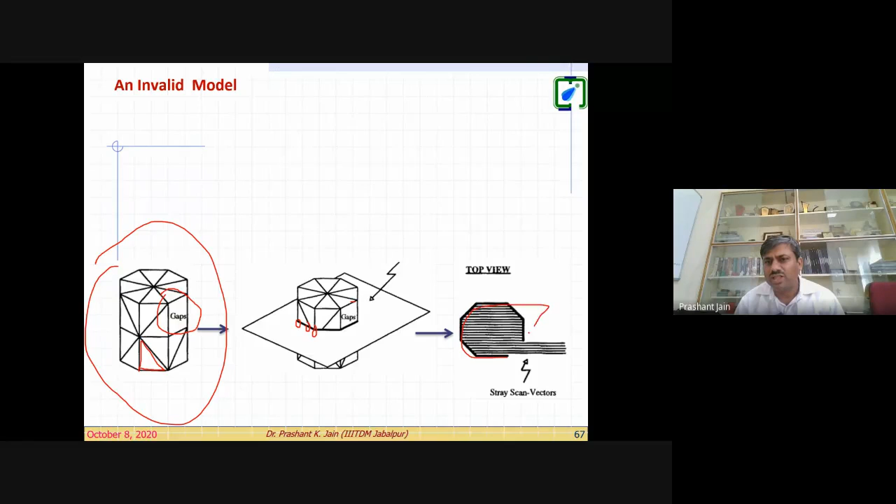But here what has happened, you see the gap is there, the hole is there. So if you cross section it, what will happen? You will receive the contour from this point to this point, and here you will not receive any line. What will happen when your nozzle starts printing? The nozzle does not have anything here to close it or come back. So what will happen? Your nozzle will start to move to infinite distance, and your system will hang here. Your nozzle path cannot be completed because there is a gap in the STL file.

Fine, that's the issue, that is the purpose. Somebody asked earlier why we are doing the tessellation. That is the reason we are supposed to do it, because otherwise there is no predefined stopping boundary on a particular slice. So the building process would continue right to the physical limit of the RP machine.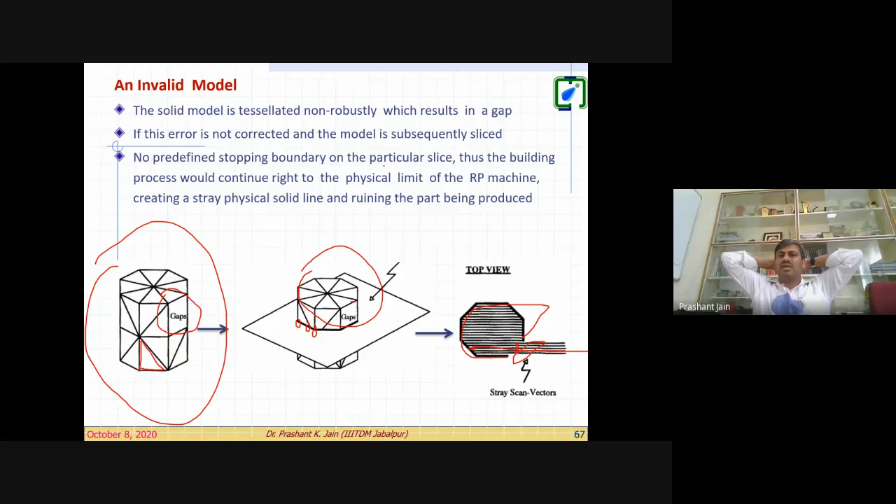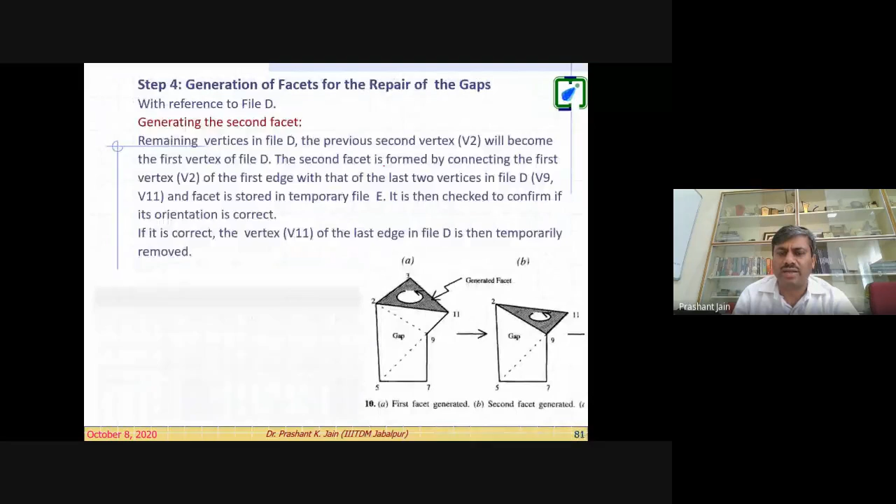There are a lot of solutions to repair the STL file, this is what I have already shown you. When we repair the STL file, we create a new loop into that. Instead of going through this complete algorithm, I will just show you how we implement this STL repair using a MATLAB program. Can you see here?

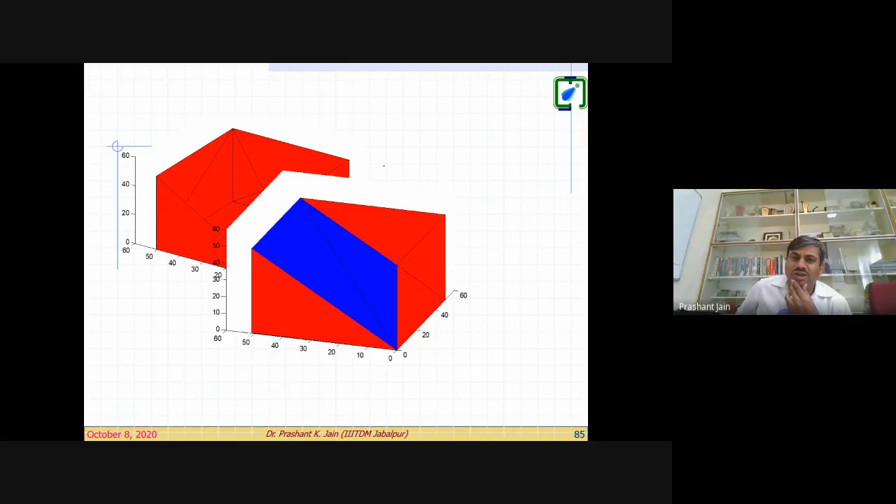Two facets are missing here. When we try to fill it, the blue color fills it. But now remember, your solid STL file is closed now, volume-wise. But this was not the original orientation, it may be different. So we can check the alternative orientation, and now you see your cube is completely closed.

And somebody was asking, can we save that? We can also save that. Let me run that program. Let me show you the run point, STL crack repair. So we can run and see.

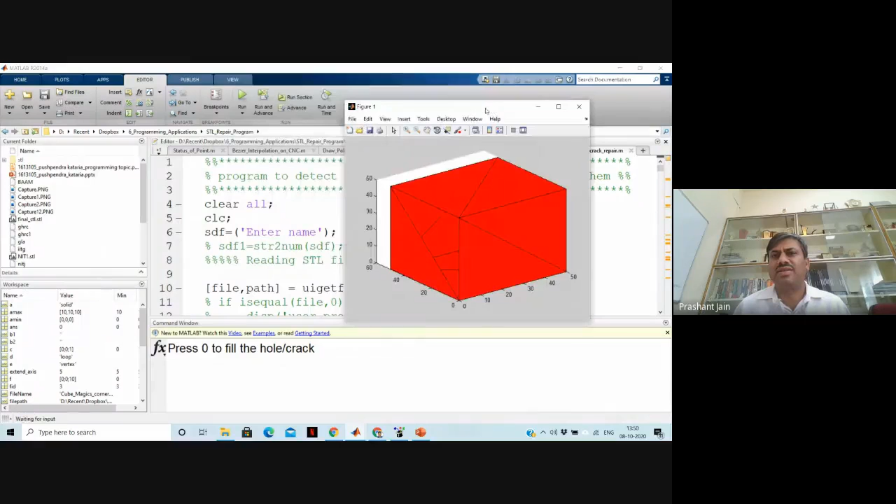I will take an STL file which has only one hole. Look at this, can you see this STL file? Can you see some lines over here? Let me make it full scale. Can you see in this file? No hole at this stage, no hole, no hole, but let me keep going. Can you see, we see the inside lines over in this direction here. There is one face missing.

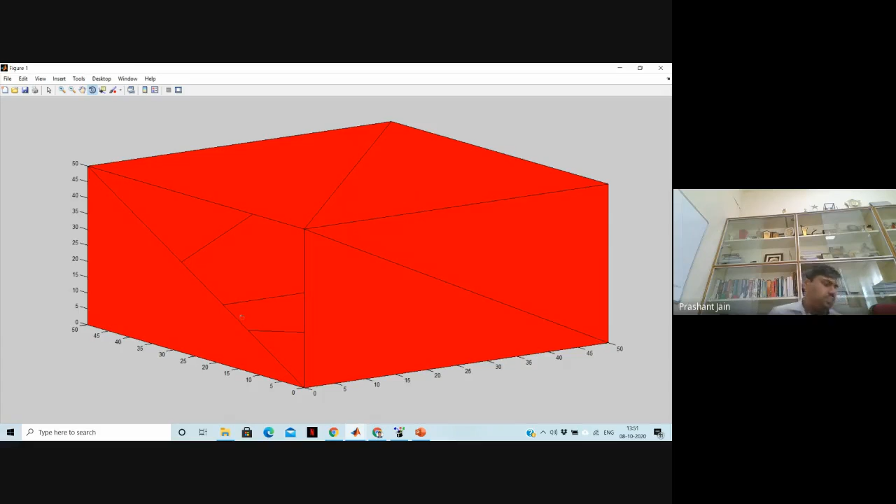Now look at this. If I go back, let me fill the hole. See, now this hole is filled. And now this is the revised version, so we can save this file.

One, to correct the orientation; two, to generate the file. So it is asking me for the name. Let me put pkj, and in the new file format, you will see that pkj STL file is created.

Look at this, the solid corrected file by pkjain, pkj file name we have given. Look at this. Got it? So in this way, we will develop the algorithm and we will repair the file.

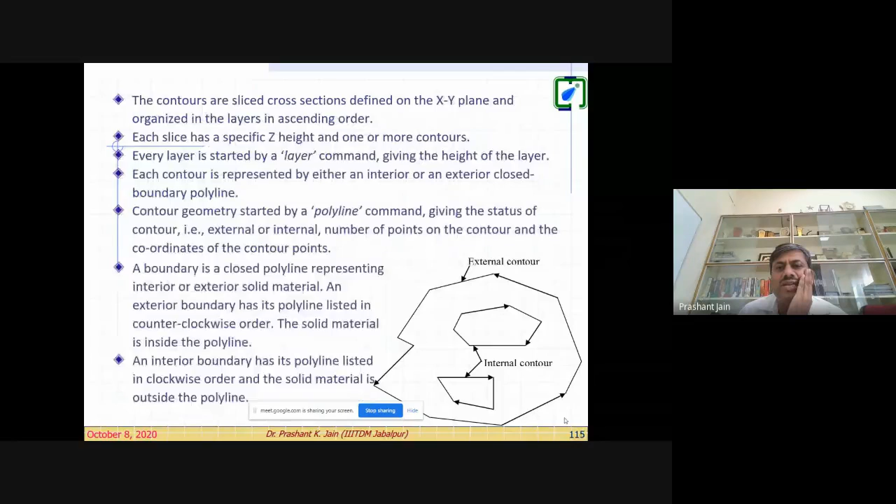Can you see my PowerPoint screen? Look at this, this is another aspect of the programming we have discussed so far. Up to error repair, we will go for the slicing. So when we do the slicing, we need to find out how the internal contour would be done, and the external contour, right?

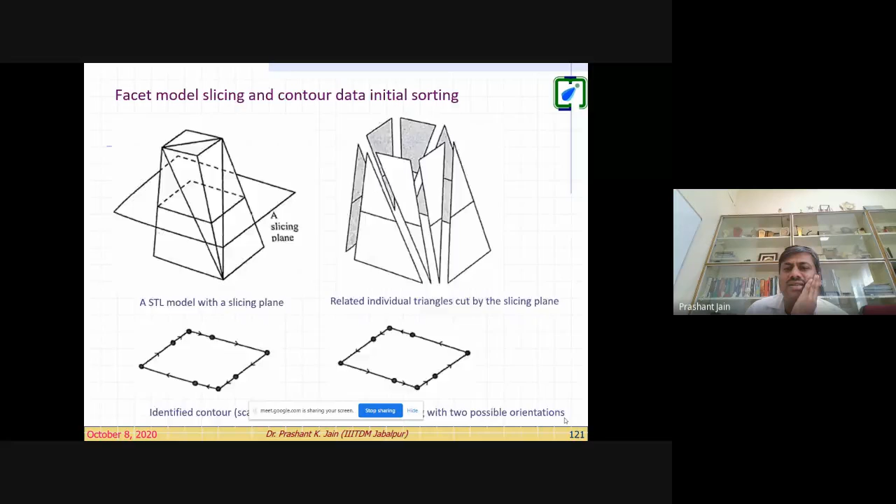We write the information in the CLI file, which has to be used by the machine. This is another format for the CLI file. This is how we take the STL, so everything would be converted into triangles, right, then we have the contour. This is the reason why we take it in triangles.

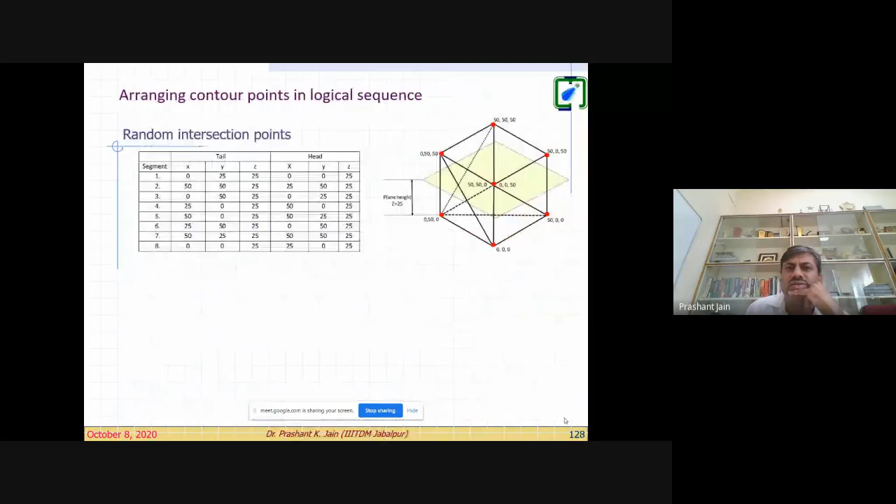Now look at this, we have to calculate only two intersection points, and a lot of equations we can develop. But slowly we can move on to developing the program in MATLAB. So this is how we do the slicing, then contouring. This is all we have implemented in MATLAB.

So any other time we will discuss. I would welcome interested users to write to me on mail and on Facebook as well, because sometimes it may become boring if I go into much detailing of the computation part, like in FDM.

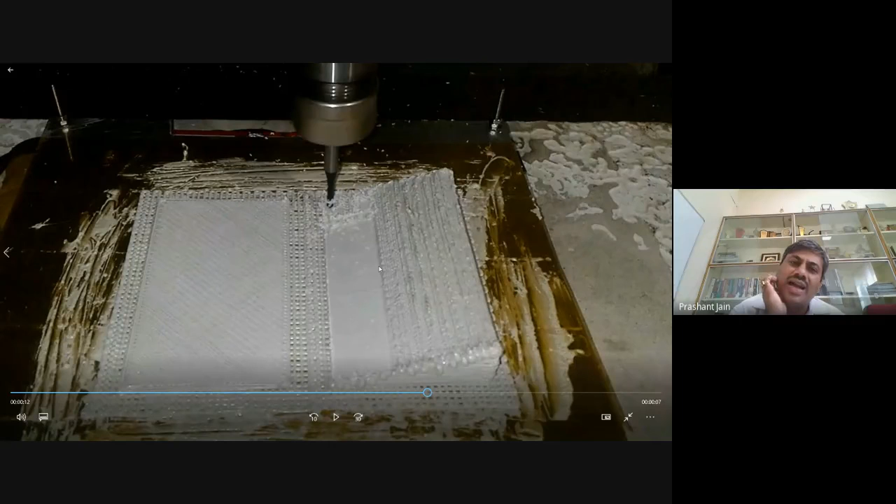Look at this, actually this is one of our DST sponsored projects, hybrid additive machining. I'm showing that video. So we have deposited the material on the CNC machine itself, you can see, and we are machining on the same setup. If I do not manipulate the STL file and generate the tool path by my own, I can't do this. So we have manipulated the STL file, calculated all the coordinates, converted those coordinates into the G and M code program to be run on the CNC machine.

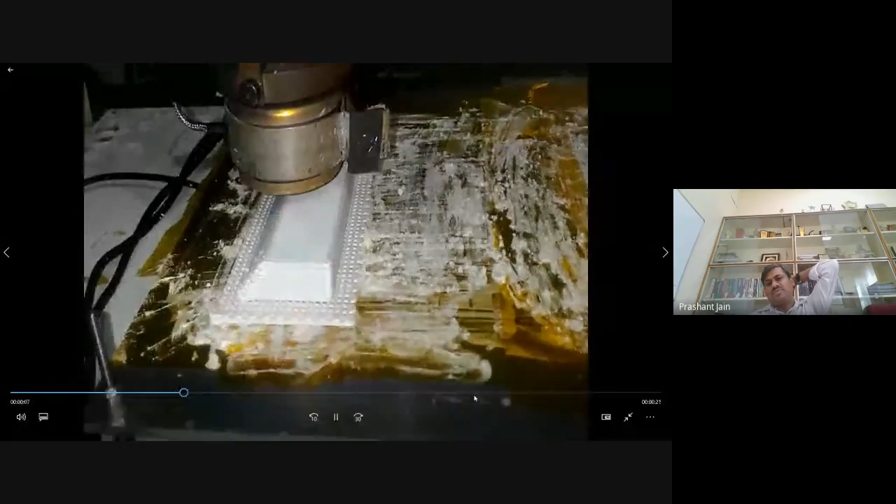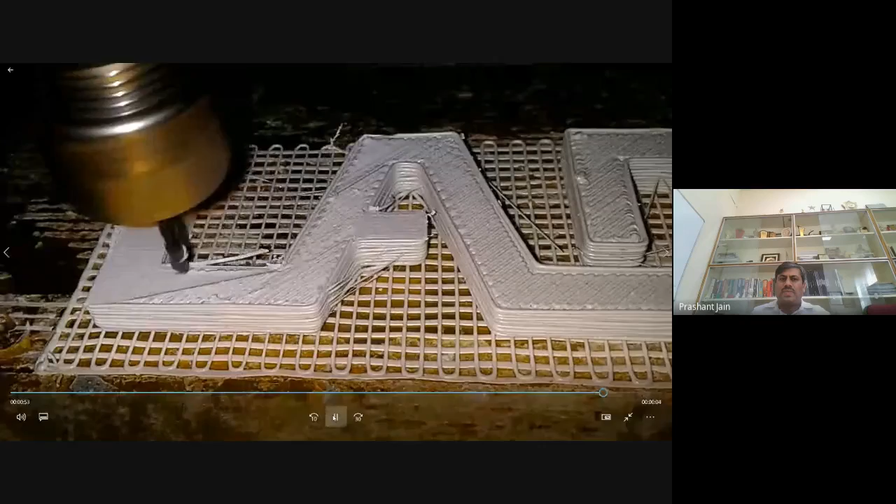You see, that is the deposition. This is the reason, if I do not develop the program by my own, we will not be able to work with only depending on commercial software. Look at this, the material deposition takes place, and you can clearly see the STL formation on this. That's the reason why we should know much about the STL file, toolpath generation, CNC machining, and G and M code. All these things are related.